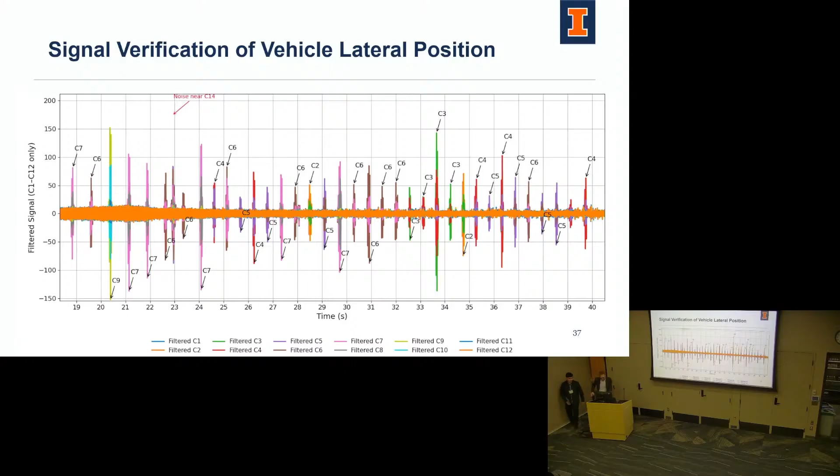Thank you. I think I just, I'll just keep going. Exactly, there we go. Perfect, one more.

All right, well, thank you very much, happy to be here. I'm Associate Professor in Civil, Environmental, and Geoengineering at the University of Minnesota, talking today about my CCAT-funded project.

This is a joint project with myself and my colleague, Professor Ziran Wang at Purdue University, and this is supporting two graduate students: Yupeng Zhou at Purdue and my student Ariane Zare at the University of Minnesota.

The idea behind the project, like the first one, is that it just started. I think we officially got authorization somewhere in December to start, or maybe a little before that, but it certainly seems like just a few days ago. This is still a work in progress, but I'm happy to give an update on what we've done so far and pitch the vision for the time we have left.

The basic idea is: can we bridge the gap between theory and implementation for CAV-based traffic smoothing? We'll go over what I mean by traffic smoothing in a bit, but the idea has been around for a while, and yet I haven't seen anyone actually do anything with it beyond maybe a couple of experiments or demonstrations. Our question was really, to some extent, what gives? Where's the mismatch? And how can we try to either identify controllers that are compatible with actual autonomous vehicles, or develop controllers that are compatible with actual autonomous vehicles?

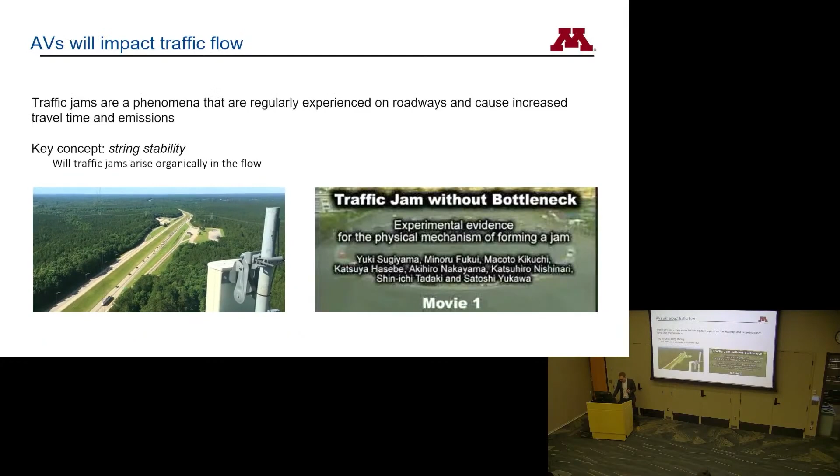Big picture, I'm a civil engineer. I love and hate traffic, and I particularly love traffic that to some extent occurs for no reason. In the wild here on the left-hand side, we can see a traffic wave emerging, traveling upstream. There's no construction, no crash or anything like that, so it's kind of unclear what's going on.

It turns out, to skip a couple decades of math, this was a long-standing debate in the civil engineering community about what's causing this, until a bunch of researchers in Japan about 25 years ago conducted an experiment where they created pure car following—pure traffic, no external bottlenecks. This is effectively an infinite loop of traffic where every vehicle has a vehicle in front of it and a vehicle behind it.

It turns out, I think the video has perhaps restarted, and you can see everyone starts at roughly uniform speed and spacing, and then somebody makes a small mistake. That small mistake is then amplified by the vehicle behind it, and amplified by the vehicle behind that, until relatively soon you have a full-blown stop-and-go wave with some vehicles at a complete standstill and other vehicles racing to catch up to the vehicle in front.

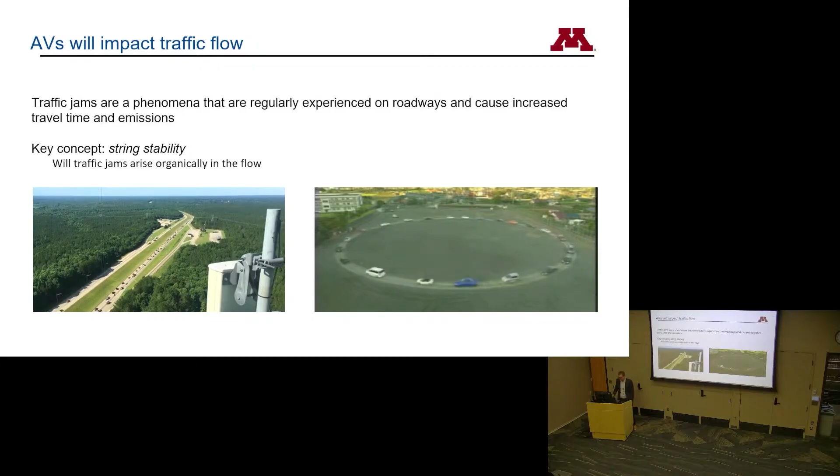This is due to a concept called string instability. The basic idea is that small perturbations from an equilibrium flow are amplified. You can see this in the wild, and you can see this in an experiment.

This is some recent data off of a test bed outside of Nashville, Tennessee on I-24, where they set up cameras on a 4-mile stretch of interstate and can get vehicle trajectories for every single vehicle across 4 lanes of travel. This is from 6 a.m. to 9:30 a.m., so 3.5 hours of traffic. You can see once the traffic hits a certain density, around 6:30 a.m., these things are inevitable. There's no construction on this highway.

There are crashes that occur as a result of these waves, but there's no construction, no fundamental reason beyond the fact that human drivers are string unstable and overreact. That's okay—they're generally relatively safe, but it's inefficient from a traffic flow perspective.

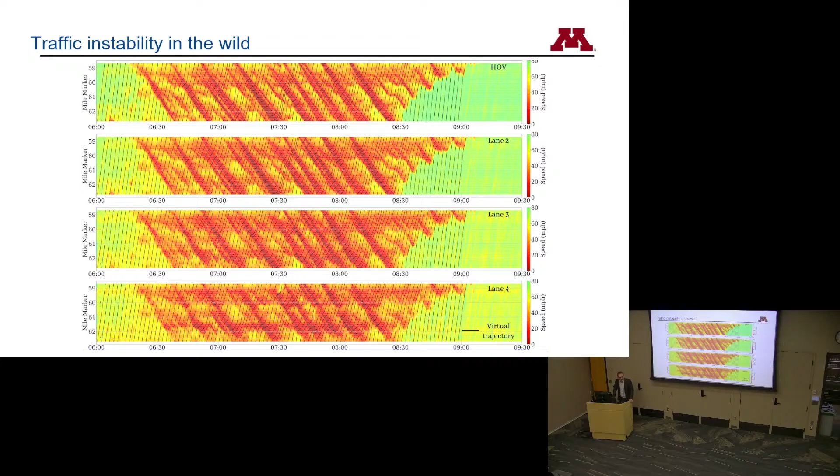I've been occupied with this for the last 15 years or so, thinking about this, and I've done quite a bit with it. One of the things I did a long time ago, I just want to show you a result from about 10 years ago, was basically trying to recreate that ring road experiment with the question of what happens when we start to switch out some vehicles for automation.

Don't want to focus on this too much, but it is the motivation for the rest of the work. The vehicle with the arrow on top, the bottom you get the speeds. The vehicle with the arrow on top is autonomous capable, and once that arrow turns red, it's now running autonomously, and you see much improved traffic.

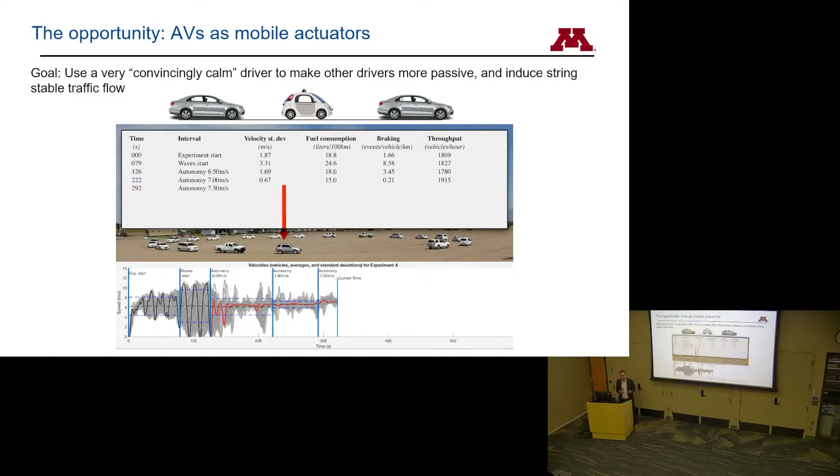Out of 22 vehicles on the track, one of them, so let's call it about 5% of the vehicles, are driving differently, driving better, actively trying to smooth the flow of traffic. The effect is very effective smoothing of the flow of traffic. Everyone benefits, everyone goes a little faster, not a lot faster, 10 or 15% faster, a little more throughput. The huge difference is in things like fuel economy, where people see 20, 30, maybe even 40% savings compared to that highly oscillatory flow. All right, so that is the basic idea.

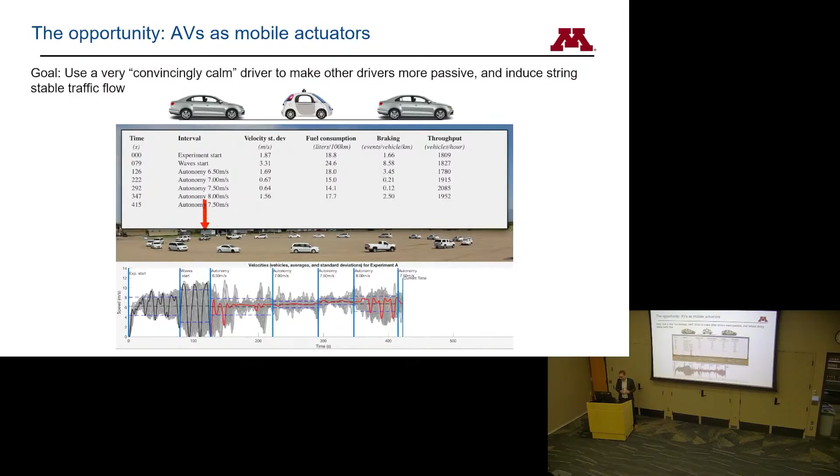With the advent of autonomous vehicles, this is possible. We now have more and more vehicles with more and more autonomous capabilities on the roads. All I'm using here is longitudinal control, the speed control. So effectively, vehicles with some level of adaptive cruise control could be doing this. However, correct me if I'm wrong, no one is.

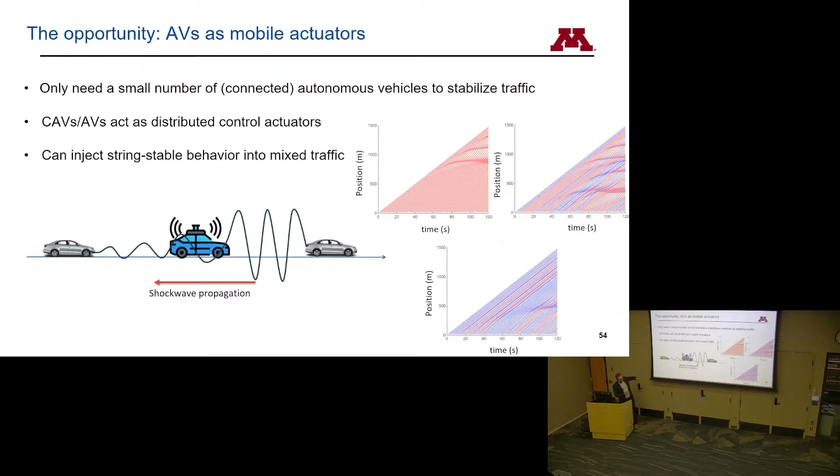And that's the real motivation here. So we can change the driving behavior of some vehicles. With autonomy, we can do this very effectively to smooth traffic. And if you look at the literature as an academic, you will see dozens of papers published over the last 10 years or so that do exactly what I showed in that video.

We smooth traffic with different controllers, different techniques. Everyone shows it on their benchmark example, and it works great on their example, on their traffic flow. But there's no standard test case, and there's no one who really says, well, how do we know which one actually works well?

And then there's a whole other component of they all sort of assume you have perfect information and a really good estimate of what that equilibrium speed ought to be. Some people assume connectivity for this, some people don't. Obviously with connectivity, you can do more things if you know how fast the other cars around you are going.

But at the end of the day, no one really talks about, okay, how do we actually get this on a car? And is it feasible? Can the cars actually do this?

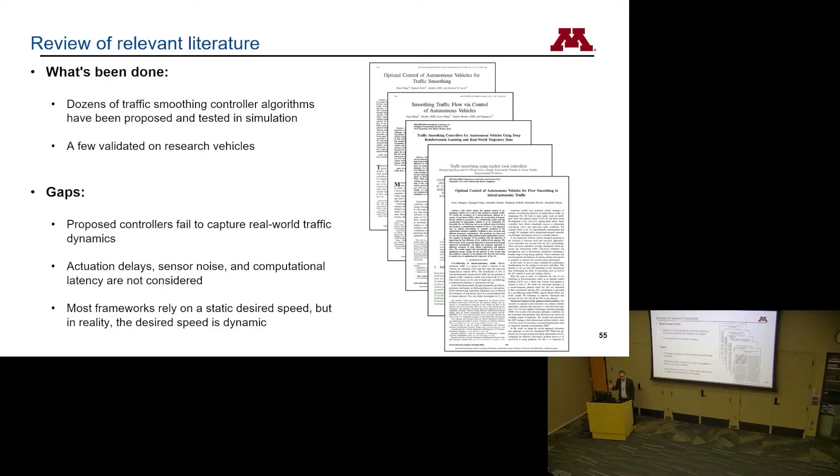That's the second part that Professor Wang, that Ziran's working on at Purdue, is how do we integrate it on the car. I'm going to talk less about that, but I want to talk about some preliminary results we have now from trying to identify how these different traffic flow smoothers stack up against each other, and what's missing between the theory and the reality.

All right, so the main question is what are those gaps between theory and reality, and how do these stack up against each other? We've started by basically scouring the literature, finding every method that we can that somebody's published that says this works relatively well. And then we've built a microsimulation environment.

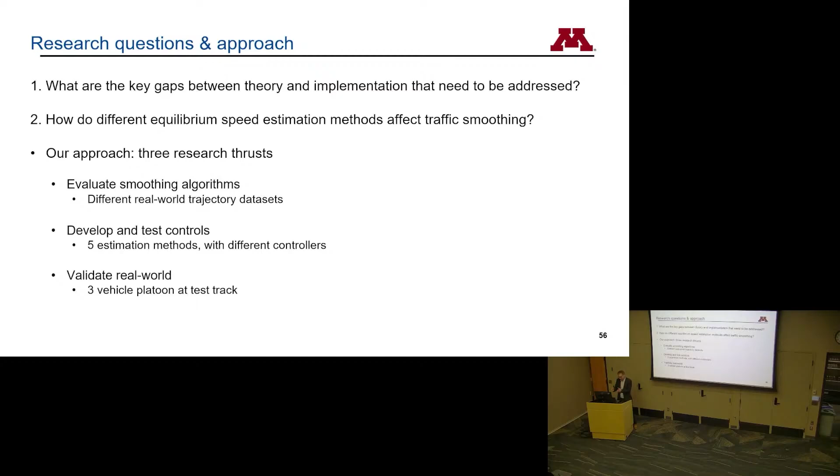So for now, we're still doing this in simulation. More on field testing in just a moment. And then we can compare them. So we're comparing both traffic smoothing algorithms as well as estimation algorithms to estimate what that equilibrium flow speed ought to be. All of this rests on microscopic traffic simulation.

So we're modeling the speed, acceleration, spacing of individual vehicles, position of individual vehicles using ordinary differential equations. There's decades of research that we can draw on here, so we can get relatively good models for what traffic flow looks like, human drivers look like, et cetera. And they all sort of follow this acceleration function up in the right-hand corner.

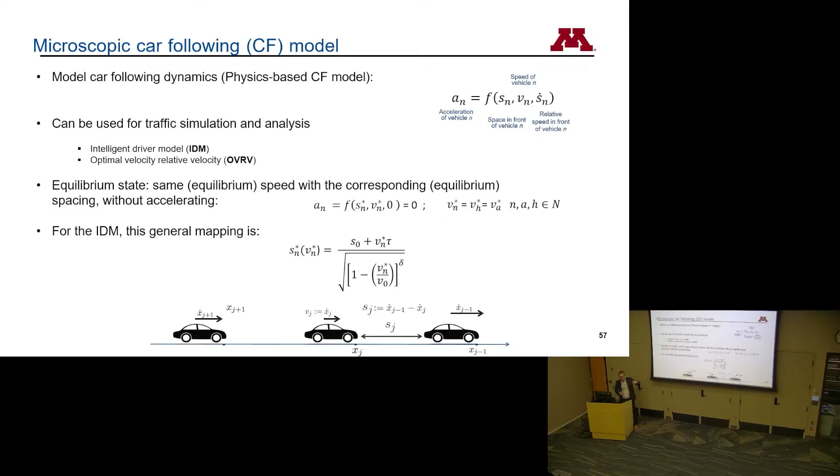Acceleration is some function of the current traffic state, or the vehicle state: the speed, the spacing, and the relative speed. Are you catching up to or falling behind the vehicle in front of you? And if you look at most of these traffic smoothing algorithms, most of them assume, okay, we're going to drive sort of like a human driver with an additional component, an additional control input that we're going to put in to smooth that flow. That's the goal.

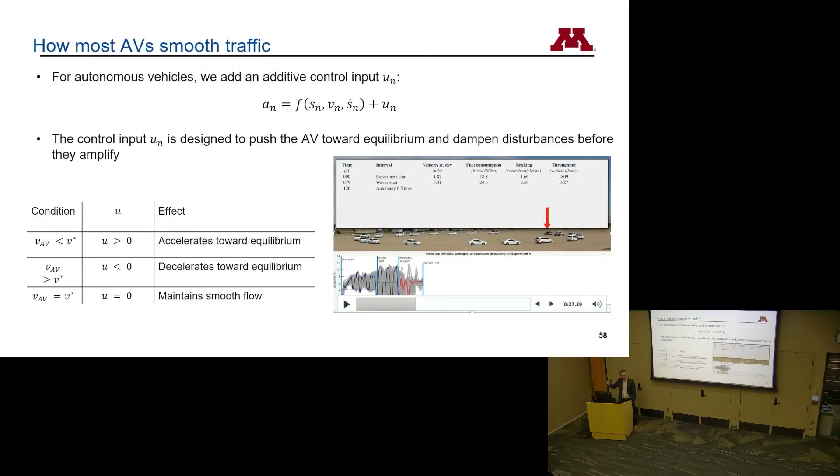And how you select that U is sort of the special sauce that every paper has a different method that they propose, and that's part of what we want to evaluate. So not going to walk through the details of how all these work, but here's just a sampling of four of them.

There's nonlinear controllers, sort of proportional-integral type controllers, and more ad hoc controllers that people have hacked together with different methods. All of these do seem to work, at least in some cases—everyone publishes a paper where they work in their test case. The question is, how well do they perform across multiple test cases?

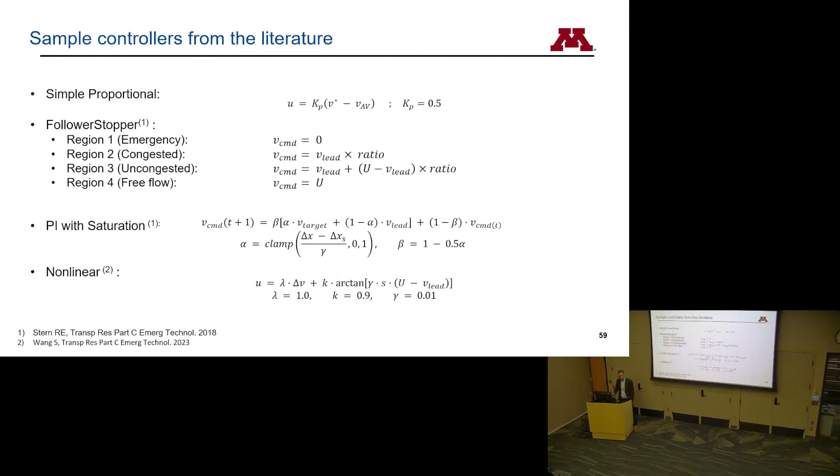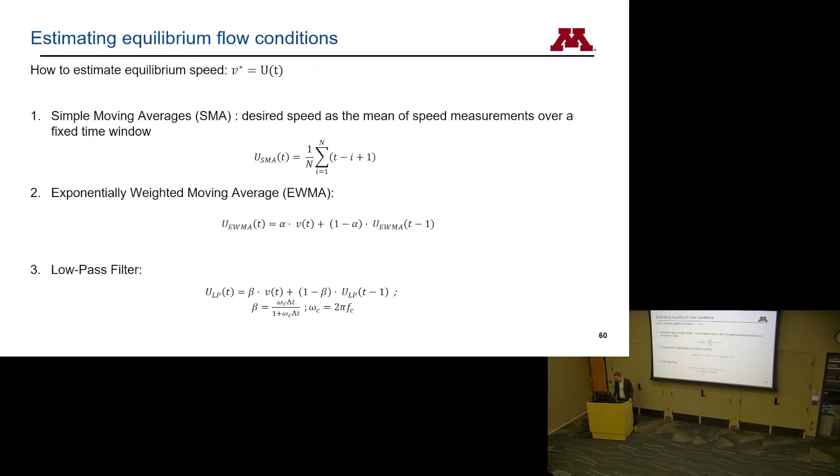The other component is that all of them require some input information about the equilibrium speed—what's the optimal speed to be going at. There are many different methods people have proposed for estimating that based on current flow conditions. If you have connectivity, you might have information from further ahead on the road about what traffic wave is about to hit you. Without connectivity, there are methods that try to estimate that based on your speed over the last couple of seconds or minutes. So we have a whole bunch of different methods here as well.

Here's a couple more. Again, with connectivity you expect better performance, but connectivity has to either be mandated or OEMs have to choose to implement it. So there's a trade-off there.

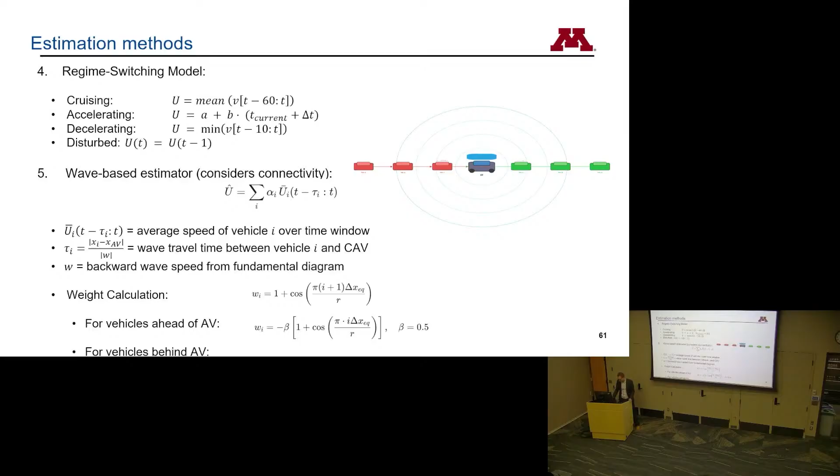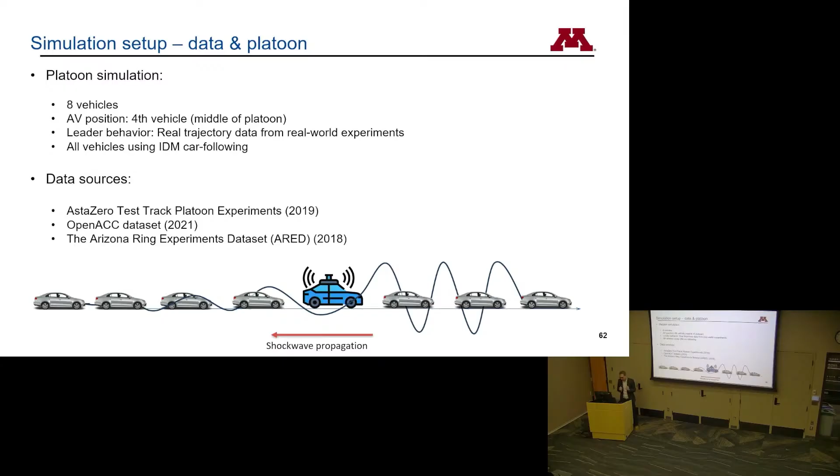All right, how are we going to test these? Preliminarily, I want to share some basic platoon simulations. We have a string of cars, and we take real-world data for what the lead vehicle does, giving us a speed profile where the car speeds up and slows down. We simulate what human drivers would experience and how they'd drive based on that. Then we put an autonomous vehicle in there that's actively smoothing with different smoothers and different equilibrium speed estimation algorithms, and we see what signal that vehicle propagates back.

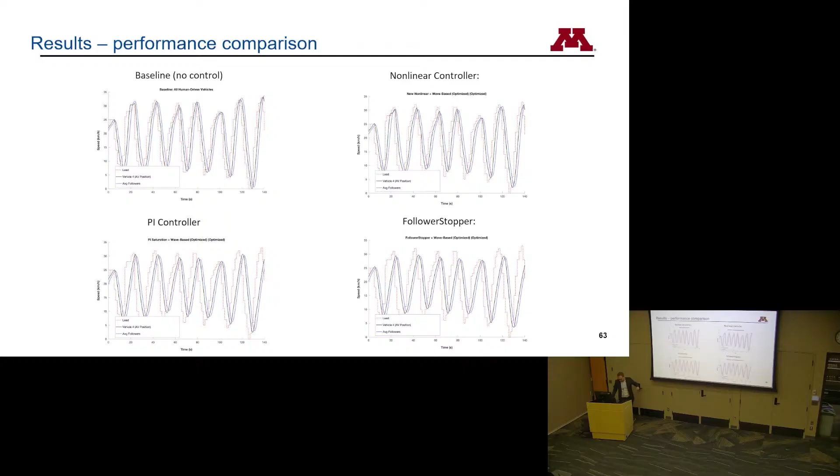I hope you can see these. So basically, different controllers perform differently. I've got a summary slide that shows how they actually compare. The big picture is, depending on which controller and which estimation method you have, your mileage will vary. We've got four different controllers: a nonlinear controller, PI, the follower stopper which is kind of hacked together, and a simple proportional controller.

If you have all human drivers on the left, that's the wave amplification you see—about nearly 8 to 10% wave amplification through this small platoon. Different controllers work differently well at reducing that, and the different colors correspond to different estimation methods. Across this particular example, I'd say the proportional controller or the follower stopper seem to perform best.

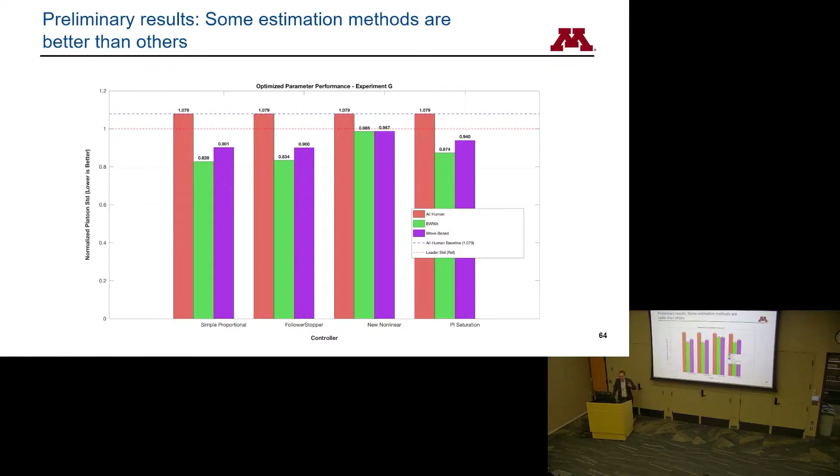All right, so where are we going with this? Again, this is all very preliminary, but I hope it gives the flavor of our goal here. I'm headed to Purdue a week from last Wednesday, where we're currently working on implementing this on their test vehicle and running a couple of small experiments. They've got a test track down by Columbus, Indiana, about two hours south of West Lafayette—an old airport shared with Cummins, the diesel manufacturer, where we can do testing. We're going to implement these different controllers on the actual vehicle, working toward bridging the gap between simulation and actual implementation.

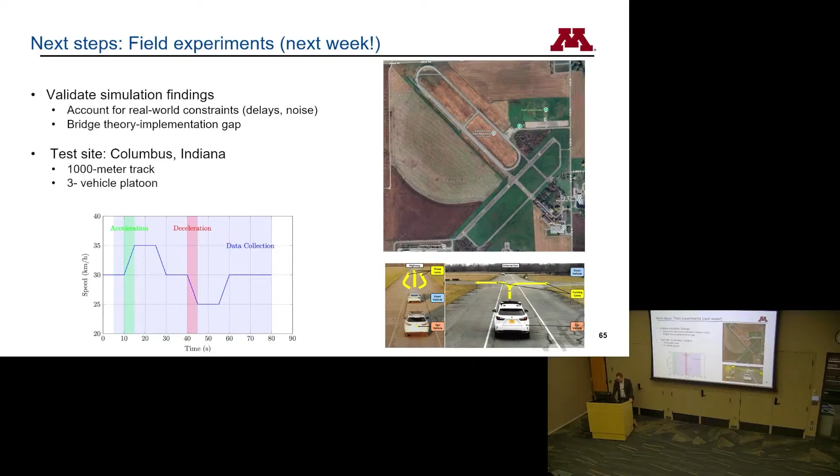So the key findings here: both the wave smoothing controller and, more importantly, your method of estimating the appropriate speed actually matter. Some of these perform better than others, and hopefully we'll be able to propose a more rigorous way to test these across a standardized set of test cases. We have ongoing research, and hopefully next year—or if you reach out to me next week—I'll have updates on how this actually works when implemented on a vehicle.

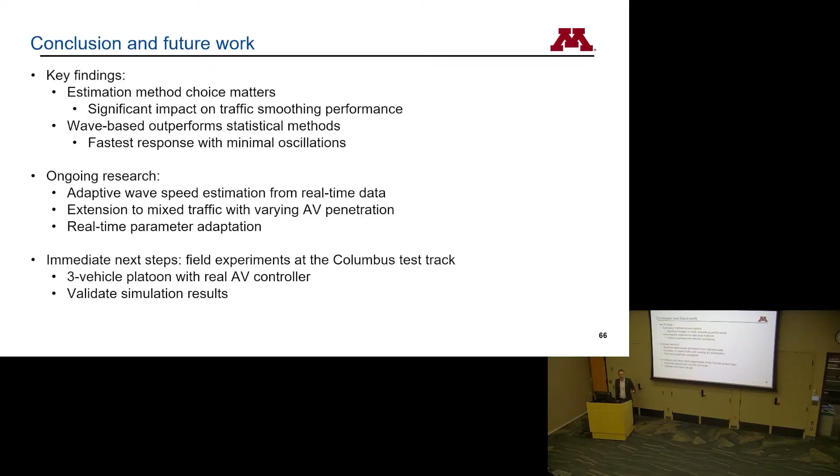Hi, it's a very interesting topic, and I'm a PhD student also at Purdue. I'm curious about the real implementation. There's a big gap from simulation to the real world. I'm wondering about the performance of your real implementation. Do you encounter problems when you apply your algorithm to the real vehicle, like if you optimize the acceleration, is there a gap between the acceleration and the acceleration torque of the vehicle, and the drag force or something?

Thanks, this is an excellent question, and before I bury the lead, I don't have an answer. But it's an excellent question, because this is exactly the point: almost all the results I've seen are in simulation. In simulation I can get my car to perfectly execute a certain acceleration. In reality though, from the high level controller that picks a speed or acceleration to the rubber hitting the pavement, there's a whole bunch of nonlinearities between the engine and transmission. It depends on the drivetrain. In a hybrid, you're dealing with additional switching logic between different drivetrains, so there's a whole bunch of nonlinearities, and that's exactly what we're trying to address in the second half.